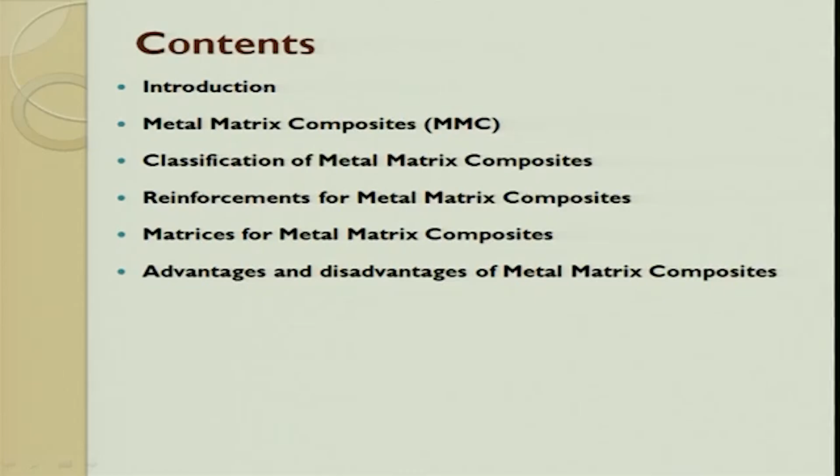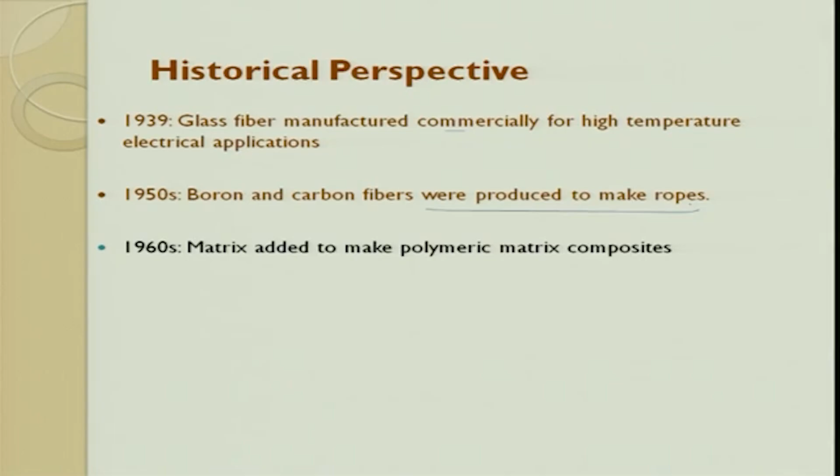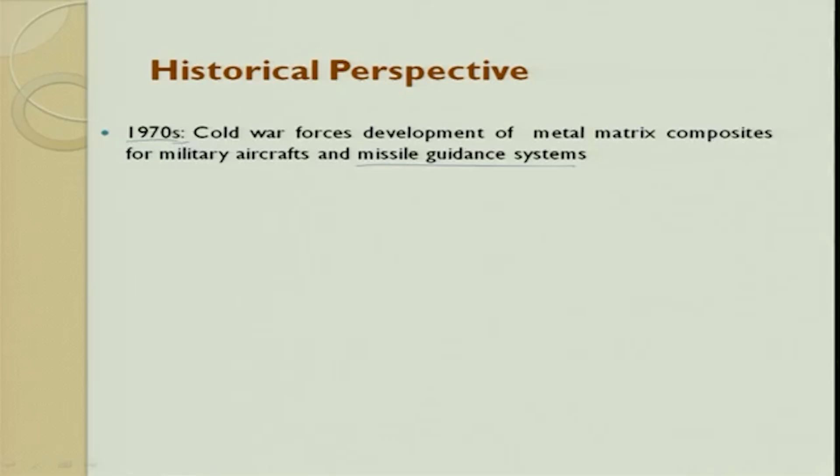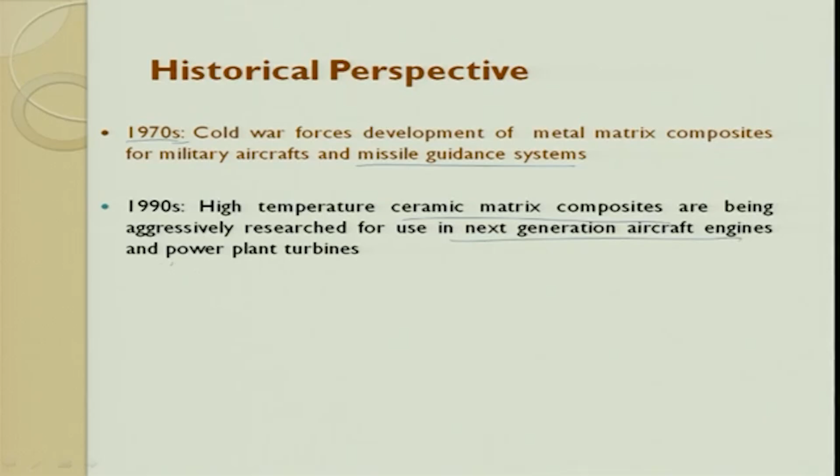From the historic perspective, I am not going into BC, just coming to AD. In 1939, glass fiber manufacturing came into commercial application for high temperature electrical applications. Then in 1950, boron and carbon fibers were produced for making ropes. Then in 1960, matrix was added to make polymer matrix composites. In the 1970s, the Cold War forces developed metal matrix composites for military aircraft and missile guidance systems. So somewhere in the 1970s metal matrix composites picked up and started getting into action. In the 1990s, high temperature ceramic matrix composites came, and they started getting into a next generation of aircraft engines and power plants. So from 1970 started the metal matrix composites.

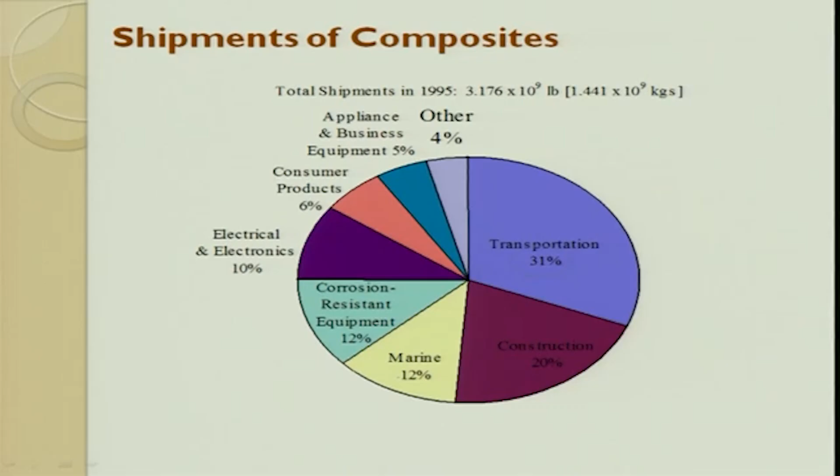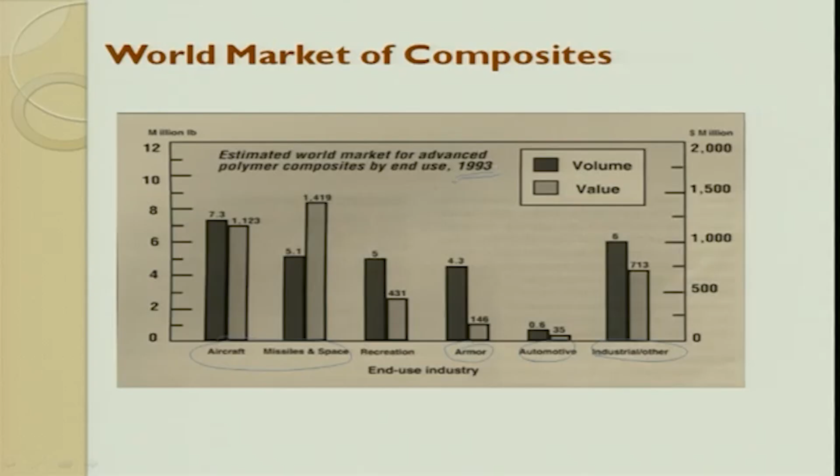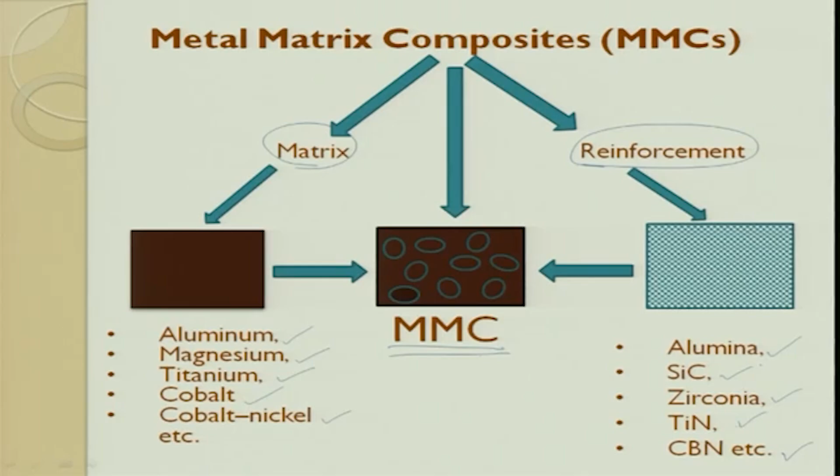What are all the reinforcing agents? It is alumina, SiC, zirconia, titanium nitride, titanium carbide, cubic boron nitride. The moment I say alumina, SiC, it is very clear that it is very difficult to make long continuous fibers out of it. Once you don't make long continuous fibers, you can't think of making mats and other forms. Today there are technologies trying to make some alumina mats, but generally these aluminas are not continuous. If it is not continuous, then it has to be only of particulate size.

The metal matrix composite can be further classified into particle reinforced metal matrix composite. That means you take very small particles with an aspect ratio, that is L by D ratio, of 1, 2, 3, less than 5. Here we take very small particles, and these small particles are dispersed inside the matrix. These composites are called particulate reinforced metal matrix composites.

The next form is short fibers. Short fibers have a slightly higher aspect ratio; a whisker can be used or a short fiber can be used. Here again the L by D ratio changes. So you will have short fibers, which can be made out of glass, or out of any ceramic materials. They are dispersed inside a metal matrix so that you get a composite.

The last one is continuous fiber or sheet reinforced metal matrix composite, wherein a continuous fiber glass mat can be used, or in other applications, people today are even trying to use cotton as a continuous fiber mat, or they are trying to use carbon roving as continuous fiber. They lay it up and then try to get an output.

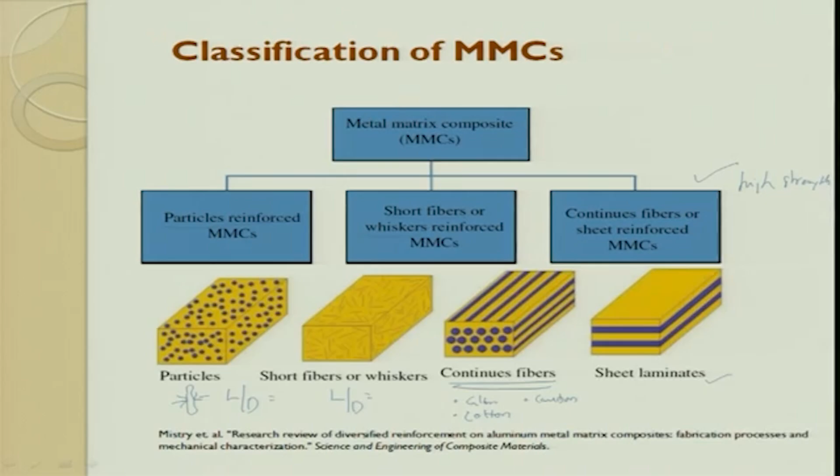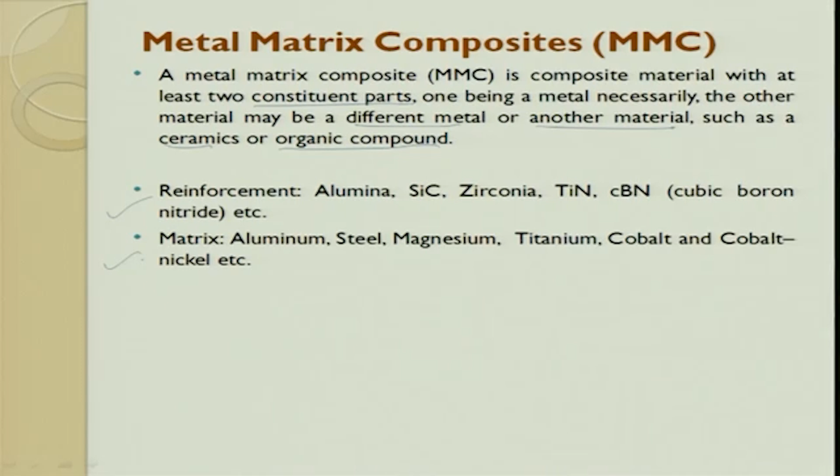So when we look into metal matrix composite, it is a composite material with at least two constituent parts, one being a metal necessarily, the other being a material maybe of a different metal or any other material such as ceramic or an organic compound. The definition is the same as for composite. We have already seen reinforcements can be alumina, zirconia, SiC, TiN, TiC, TiCN, cubic boron nitride, all these things can be used. The matrix can be aluminium, steel, magnesium, titanium, cobalt, nickel.

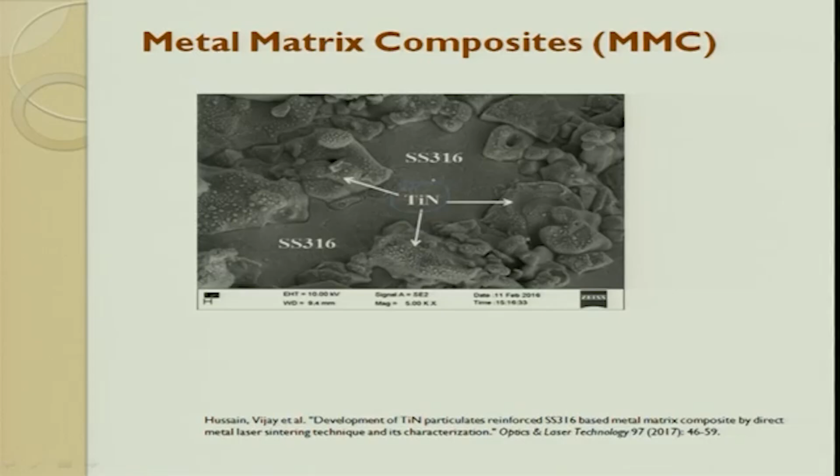So when you try to see microscopically what happens when you mix it up with the metal: here, TiN is a ceramic particle. This ceramic particle sits inside a matrix. These are TiN particles, and this sits in a stainless steel matrix. This is a metal matrix composite, and it finds applications for wear resistance, that means to say enhanced tribology and strength properties.

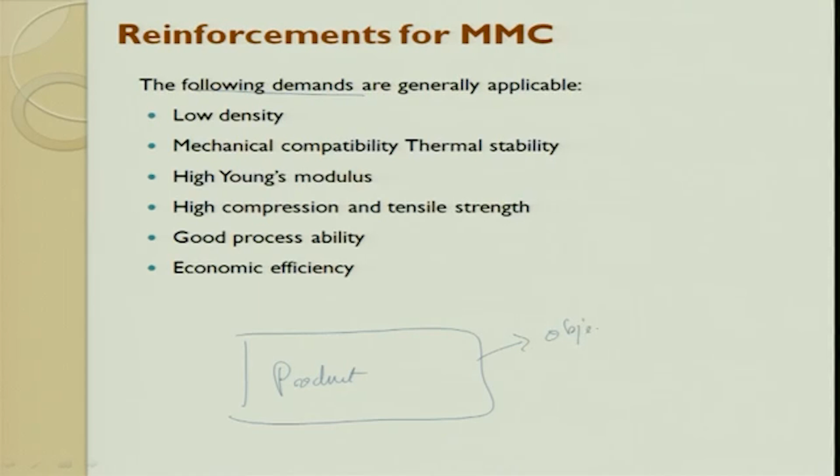So what are the basic demands? When you make any product, the first thing which comes to your mind is you have to fix your objective function. The objective function, in terms of composites, is mechanical properties, which are very important. Then it is also the physical properties. Then you have the chemical properties, and at last you have the electrical properties, which in fact get into the physical properties itself. So we are more focused towards physical and mechanical properties. So these are the demands for moving into metal matrix composite.

Keep in your mind when we talk about aerospace application, it always demands lightweight, high strength, high stiffness application. So it has low density and it has to have high Young's modulus, high compression and tensile strength, good processability, it has to be economical, it has to be mechanically compatible with thermal stability. Basically, when we try to move out of polymer and get into metals, what we always look forward to is slightly high temperature applications. At a higher temperature, the material properties should not change. So somehow you have to arrest the property expansion or contraction, whatever it is. So we add one more phase into it and make sure that it stops that expansion and contraction.

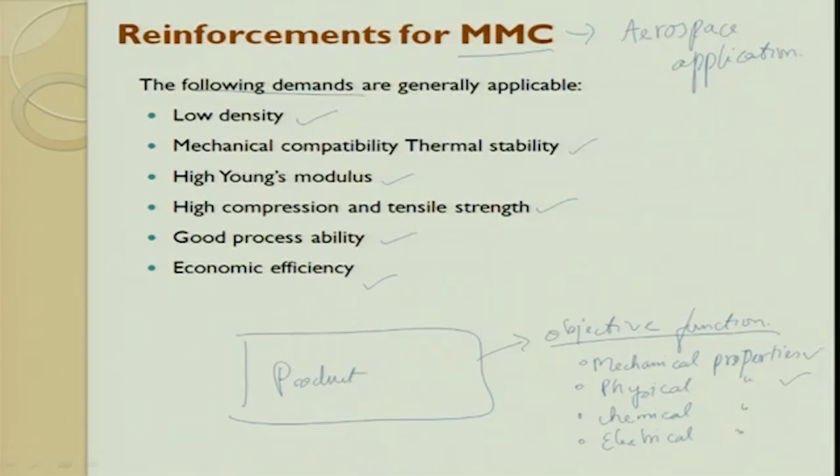So these are the properties which we always demand from the application point of view. It has to be low density, mechanically compatible with thermal stability, that means high temperature application, then high Young's modulus, high compression and tensile strength, good processability, that means I should be able to produce the required product in a very economical way. Economical in terms of number of steps involved to reach the output. Second thing is the capital investment involved in the machine. Third thing is how reliable the process is to produce the output. You can have a process which produces the output, but if the capital cost is very high, then the processing becomes a challenge, and you will not have a customer for it. Finally, it should be economically efficient for applications.

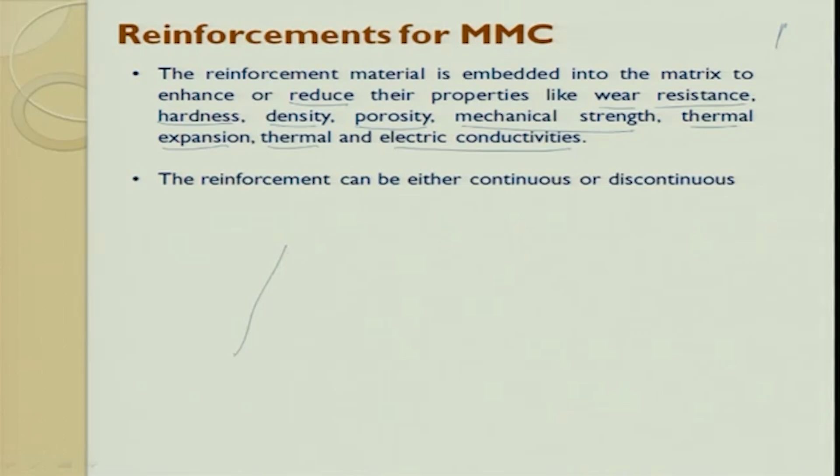The reinforcement, whatever the material is, is embedded into the matrix to enhance or even reduce properties like wear resistance, hardness, density, porosity, mechanical strength, thermal expansion, contraction and electrical conductivity. Just as an example, we see all these transmission towers, which transmit power from one place to the other. These towers are connected with cables, and these cables take the power and run for several thousand kilometers to transmit power from the production to the customer.

This cable is quite heavy, and in order to avoid this cable sagging, they always go for these towers. The tower's basic function is only to hold the cable. As and when you transmit for a longer distance, the cable gets heated and tries to sag. In order to avoid this sagging, we add these towers, and these towers are pretty expensive. So what people have done is they have now started changing this cable, whatever was earlier made out of an alloy, into a metal matrix composite.

So, what is the advantage? It has now enhanced properties such that it does not sag very much. So, once it does not sag, the number of towers goes down. So, the initial investment cost of laying for electrification goes down significantly.

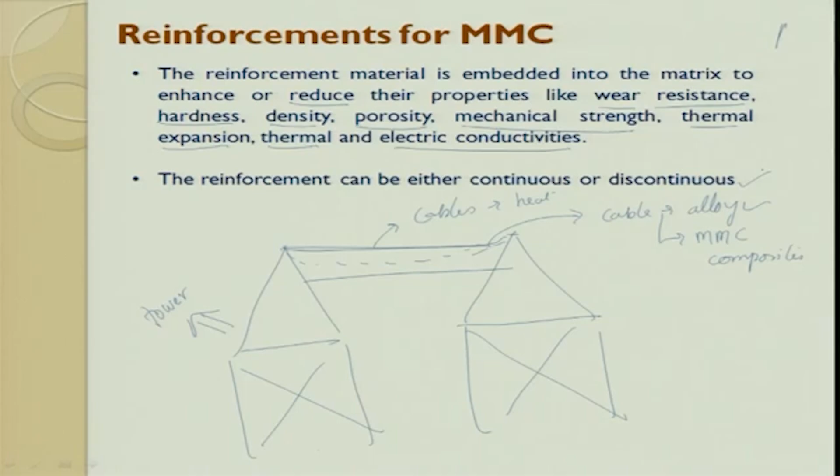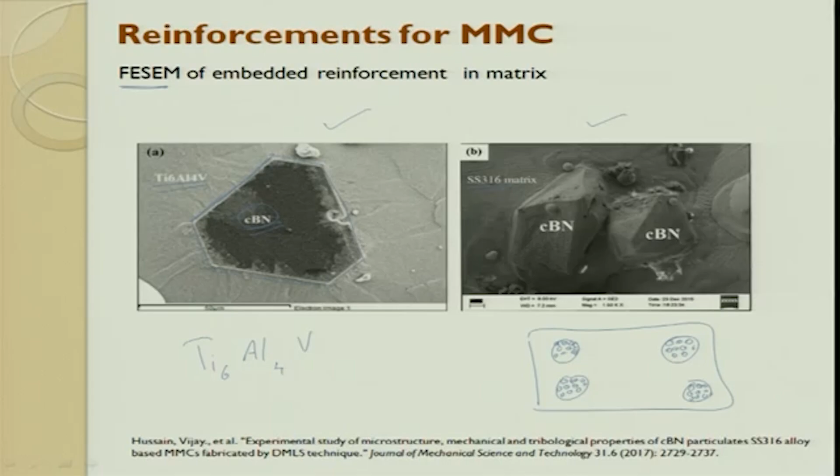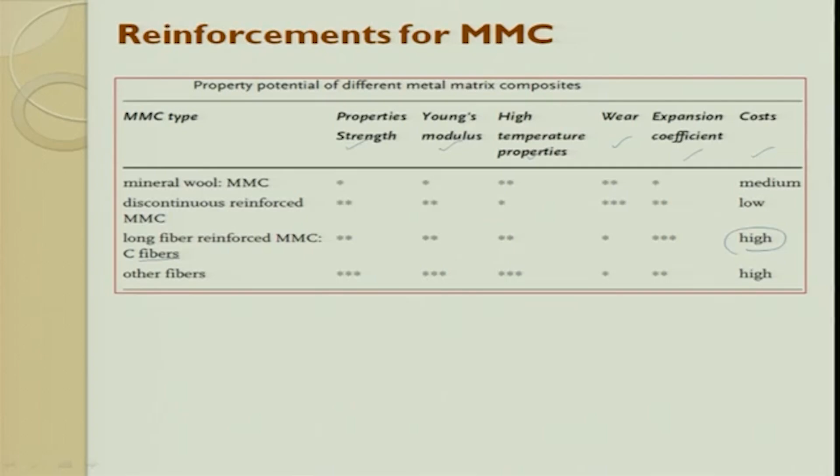So, what is the property of this matrix? The matrix is a monolithic material into which the reinforcement is embedded, and it is completely continuous. That means to say the reinforcement is getting dispersed. That is what we are trying to say.

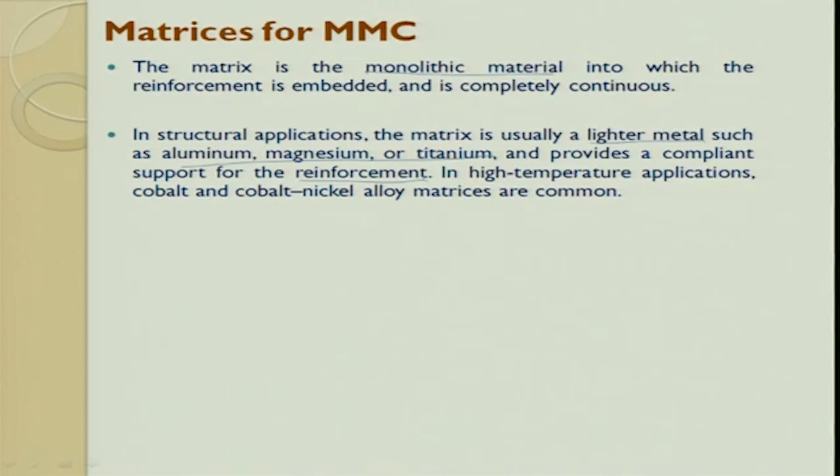In structural applications, the matrix is usually a light metal such as aluminium, magnesium and titanium. In structural applications where there is load bearing, the matrix takes load and provides a compliant support for the reinforcement. In high temperature applications, cobalt and cobalt nickel alloys are used, very commonly. So, this we have already seen. This is the matrix and these are the reinforcement.

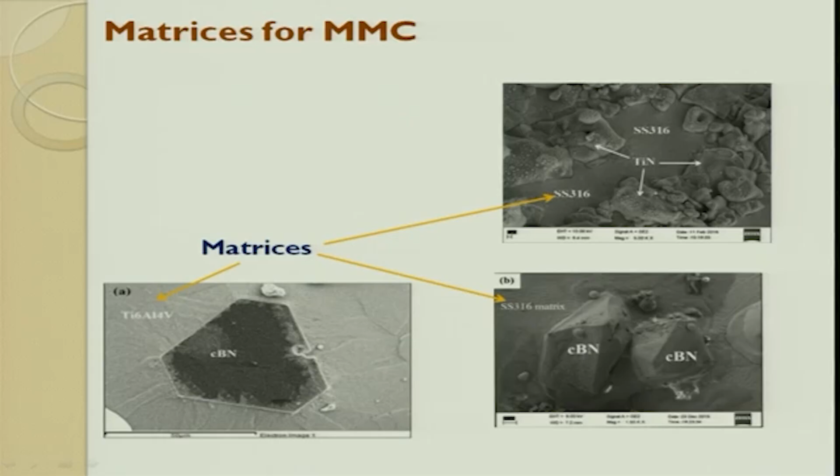So, the most commonly used metal matrix composite is aluminum metal matrix composite, which finds a lot of application in automobile, aerospace, construction industry. It also finds use in the entertainment industry. That means to say very low cost, which is used for some applications. So, aluminium is lightweight, so it is used.

Next is magnesium, which is much lighter, but it also finds a lot of application in aerospace. I have missed one, marine. Then copper we have seen in several applications for thermal conductivity and electrical conductivity. We always go for copper metal matrix composite, and people today have started using this for wear resistance also. For example, the switch breakers are now made out of copper metal matrix composite, rather than bimetallic, for enhanced life.

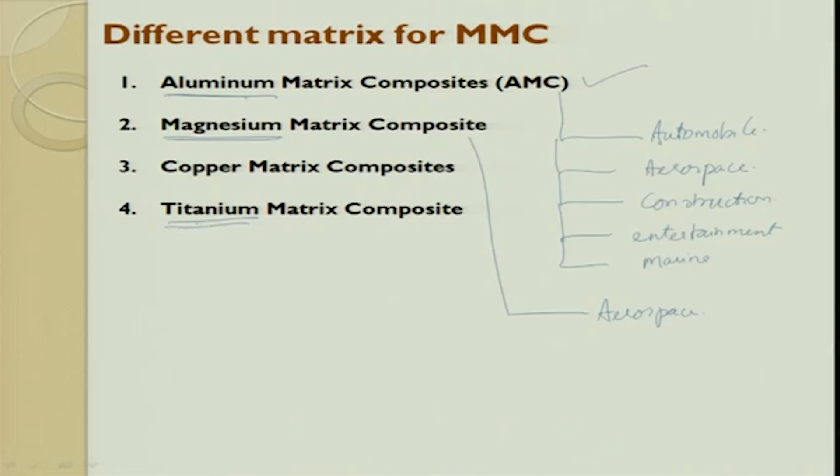Then you have also titanium, which is again used for aerospace. Amongst these three, aluminium is the most economical, and magnesium and titanium are slightly expensive, and processing of magnesium and titanium is a little tricky, because we will see that as and when we go. So, aluminium metal matrix composite has wide applications.

Aluminium metal matrix composites are usually based on aluminium silicon alloy, and among the alloys there are the 2XXX and 6XXX series, there are several series. Every aluminium alloy is given a number, so by looking at the number, you can quickly find out the composition. This is used as a metal matrix, and then the reinforcements are generally alumina particle or SiC particle. So, this can go for a volume fraction.

When I say particle, you should quickly think about how much the content should be. The content you can talk about in terms of weight percentage or volume percentage. Generally, we talk in terms of volume percentage. Volume to weight conversion is nothing but multiplying by rho. Rho is nothing but mass by volume. So, you play with it and you get what you want. So, aluminium and SiC. You can also have continuous fibers of alumina and SiC, graphite, long fibers, and you can also have discontinuous fibers of alumina.

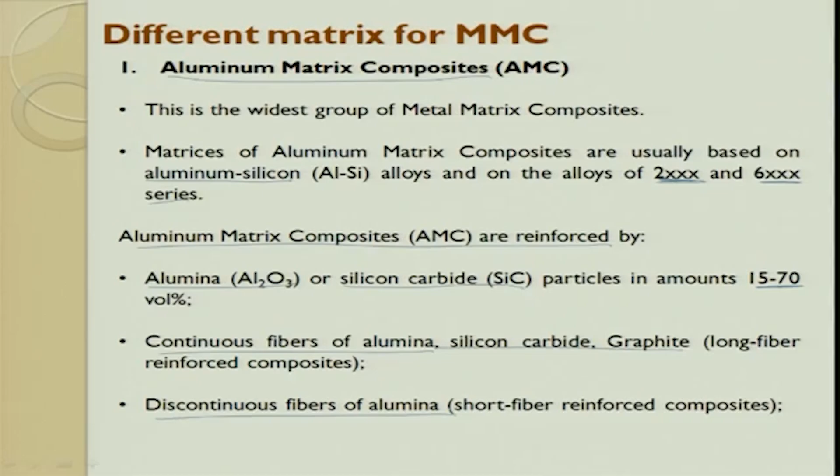Aluminium metal matrix composites are made by three processes. One is the powder metallurgy route, which is the sintering process. We will see the sintering process a little later. Then we have stir casting, and then we also have infiltration methods. What are the properties? High strength at elevated temperatures, high modulus, low density, high thermal conductivity, excellent abrasion resistance. See, when you have a metal matrix composite, you have ceramic particles sitting.

So, these are ceramic particles which are reinforced. What happens when you have any tribological application, when there is a ball or a flat surface moving, these particles will try to prevent the contact between the sliding surface, the ball, and the base material. And when they protect the base, they always try to reduce the wear. So, this is what is abrasion wear, right.

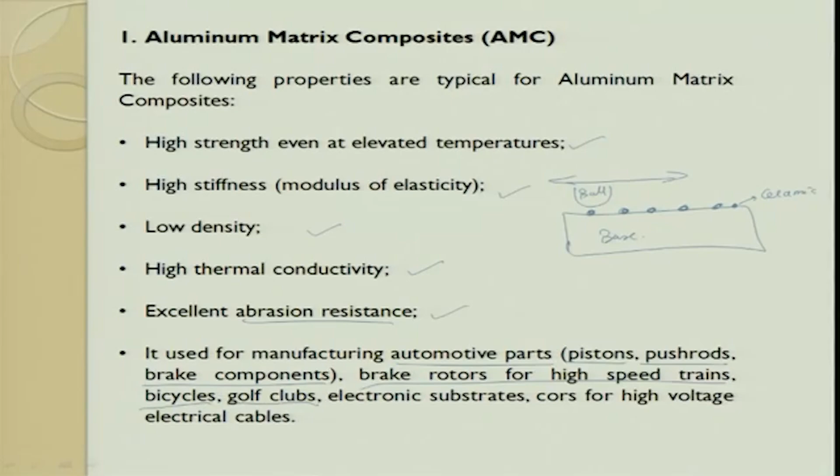It is used for automotive parts like pistons, push rods, braking components, then brake rotors for high speed trains. Bicycles today are made out of metal matrix composite. Today you have very light bicycles coming out. First, all these bicycles moved from steel frame to aluminium frame, where the weight reduction was there. From aluminium, today they have gone to carbon composites, which are much lighter, and all the parts are made out of aluminium metal matrix composite. Then golf clubs, electronic substrates, and cores of high voltage electric cables are made out of it.

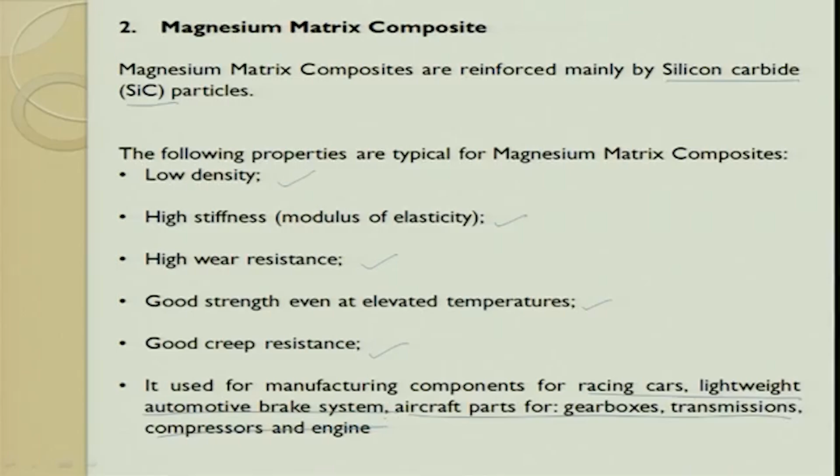When you go to magnesium metal matrix composite, it is generally reinforced with SiC particles. So it has low density, high stiffness, high wear resistance. It has good strength at elevated temperatures. It also has good creep resistance. We already studied what creep is when we studied the mechanical properties. I would request you to go back, look into the slides and get that information. So it is used in racing cars, automobile braking systems, aircraft, gearbox, transmission, compressors and engines.

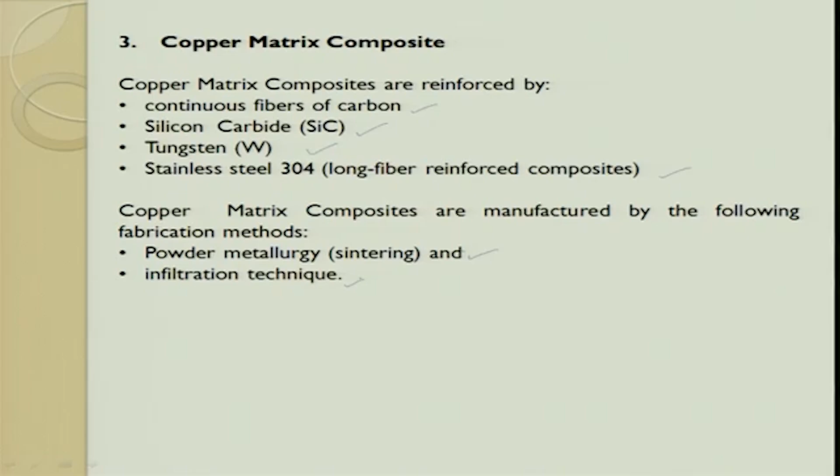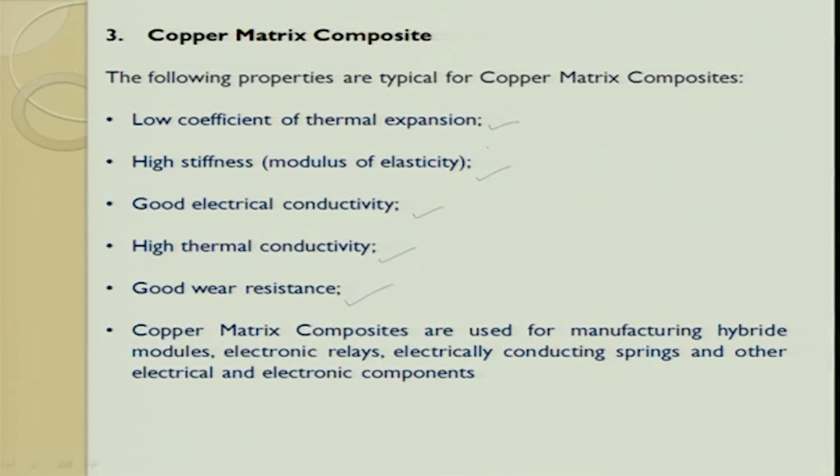Then copper metal matrix composite. Continuous fiber of carbon, SiC can be used, tungsten can be used, stainless steel can be used. The processes for making copper metal matrix composite are powder metallurgy and infiltration. In the same way for magnesium, we have the same processes: powder metallurgy, stir casting and infiltration. Again the properties: low coefficient of expansion, high stiffness, good electrical conductivity, high thermal conductivity, good wear resistance. Here we don't talk about density because copper density is high.

When you go to titanium, titanium metal matrix composites use continuous monofilament silicon carbide fiber. When you talk about silicon carbide fiber, you basically have a metal fiber, and on top of it they coat silicon carbide by the CVD process. So what is the problem with this? When you have a curved surface, the bendability becomes a problem, or the corner radiusing becomes a problem.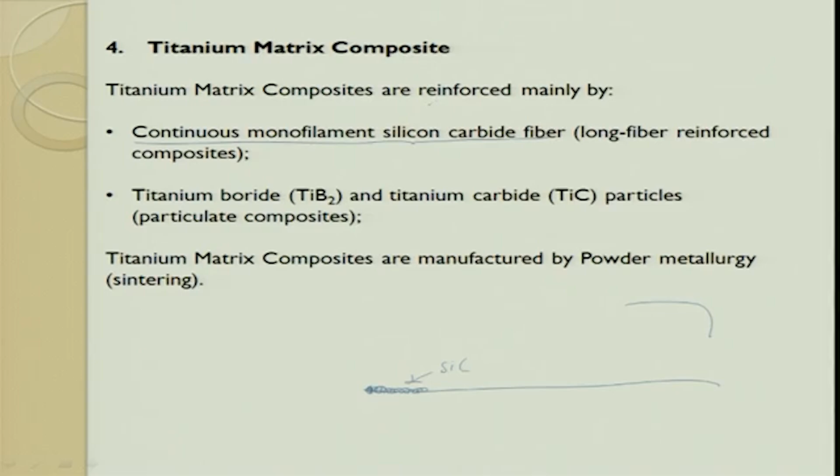When you talk about titanium boride, TiB2 and TiC, these are some of the particles which can also be reinforced in titanium metal matrix composite. Predominantly what we use is the powder metallurgy route. So here the strength comes, stiffness, creep resistance, thermal stability, wear resistance is also there. Okay, and it is also lightweight.

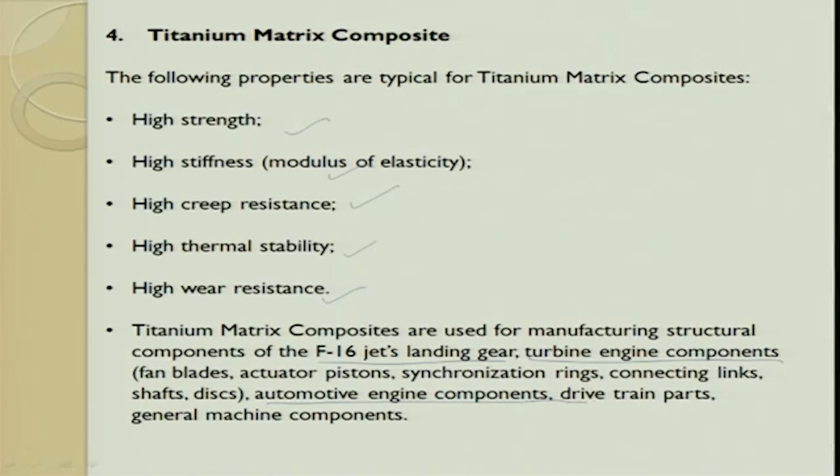So here F-16 jet landing gears are made out of it. Turbine engine components, high temperature fan blades, actuator pistons, synchronization rings, connecting links, shafts, discs are made. Automotive engine components are made. Drivetrain parts are made, and other general machine parts are made out of titanium metal matrix composite.

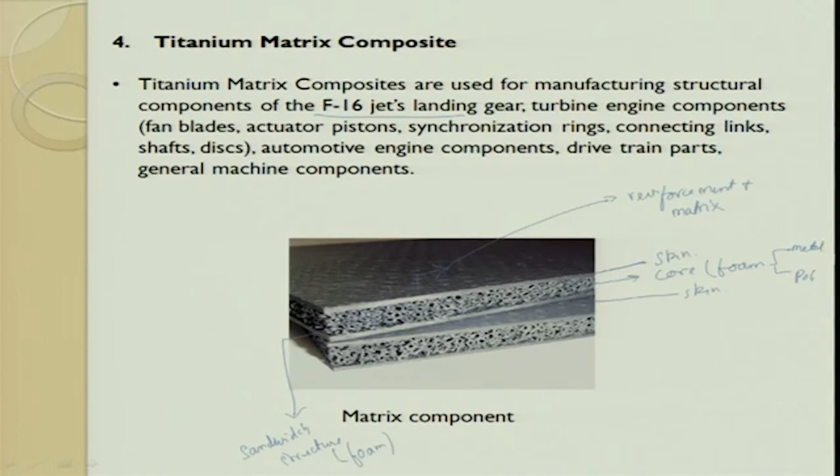Depending upon your requirements, you can try to use it. This core, whatever I said, can be a foam, and the foam can be of two types. It can be a metal foam or it can be a polymer foam. So here in this application they are made out of metal foam.

So what are the advantages? High temperature capability, fire resistance, high transverse stiffness and strength, and no moisture absorption. In polymers you have the problem of hygroscopicity, but here there is no moisture absorption. It is highly conductive in terms of electrical and thermal, has better radiation resistance, high strength and modulus, low thermal coefficient of expansion, and whiskers used for conventional metal equipment can be used for fabricating these types of composites.

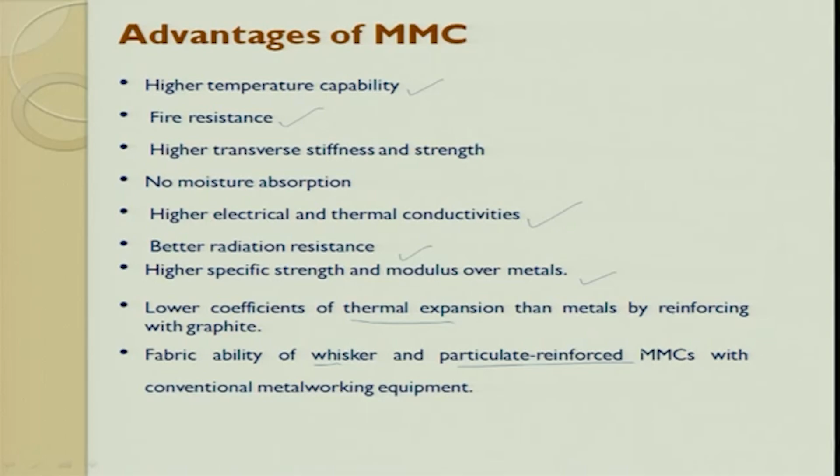But the main disadvantage is that it is not economically competitive, except for the transportation industry where aluminium metal matrix composite is used. That is competing with aluminium alloys, and people have changed a lot, keeping energy efficiency in mind. Titanium alloys have got into the aerospace industry, but still it is very expensive for a regular customer to use, and relatively the technology is immature. That means the consistency in the product output when you use it for large areas is even now a challenge. There are few companies who have learned the skill and excel, but others always try to make it; the rejection rate while making metal matrix composite varies from 10 to 20%, depending upon the size, shape and accuracy.

The complex fabrication method for fiber reinforcement is always a challenge. If it is a particulate reinforcement, it is very easy. Fiber is always a challenge. People still have a lot of challenges with respect to fabrication using long fibers and even woven fiber mats for metal matrix composite. Today people are working on taking glass fiber mat and trying to infuse metal matrix. The only problem is these glass fibers are very light. So if you want to make several layers, laminates, and then infuse, these reinforcements displace from their existing position, and we are not able to control the flow of the metal matrix into the glass fiber.

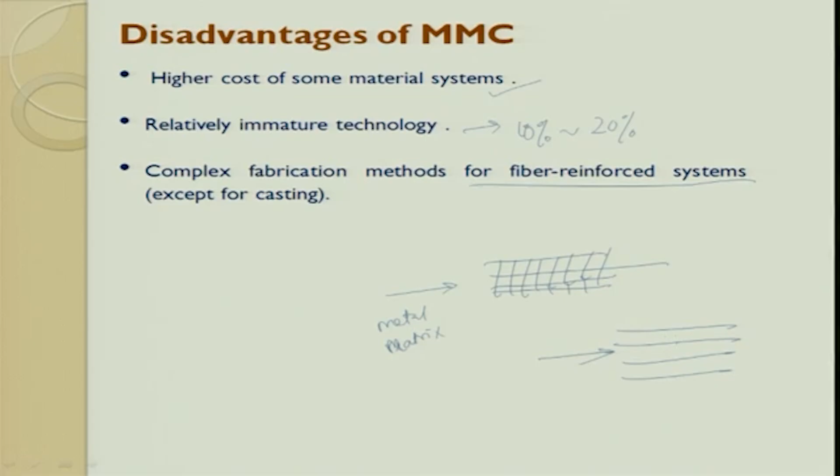So today we end the lecture with a small assignment, and again it is for your own self learning. What kind of composites do you suggest for biomedical application? Whatever we have seen, what have we seen? We have seen aluminium, titanium, magnesium, copper. Which one? Cobalt. Which one do you suggest? And if you suggest anything, say for example aluminium, then explain why you chose this composite. So I repeat, you are supposed to choose a composite for biomedical application. After making your choice, please list down all your essential properties and justify your answer that this is the best as compared.

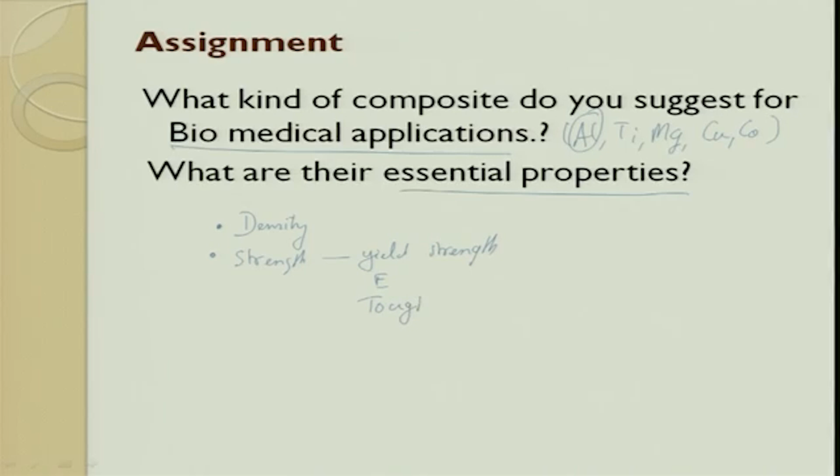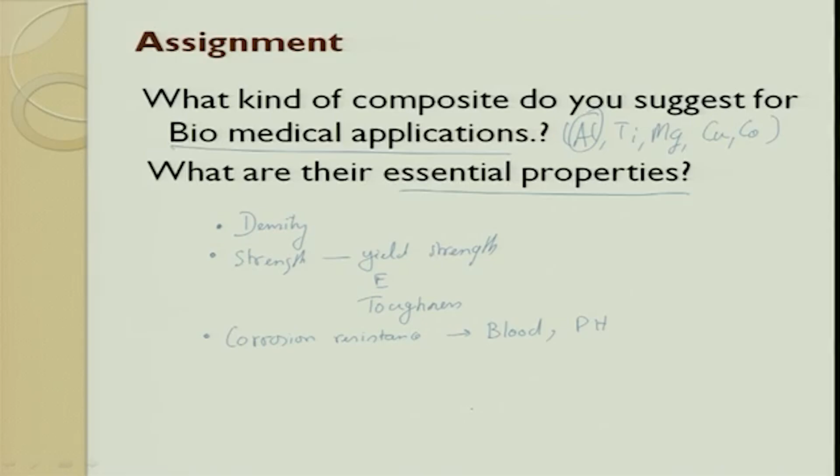So basically what are you supposed to do? You are supposed to look into, when it gets into the body, its density, its strength. When you talk about strength, you look at yield strength, you look at E, you look at toughness, then you look at corrosion resistance. Because in our body we have blood which has a pH. So you have to find out what the pH is and which material is conducive for it, and then choose the proper composite material. So with this we come to an end of this lecture, and this assignment is self-learning